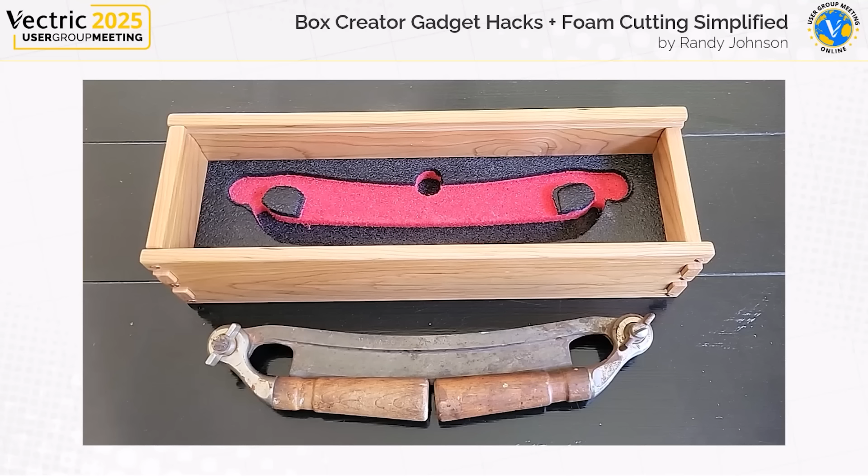One was I wanted to use extended finger joints, that is where they extend slightly beyond the side of the box to give a decorative look. I also wanted the finger joints to be equal in height. The second item I was after is I wanted to use a sliding lid as opposed to a hinge lid. And the last major item was I wanted to create a foam insert to hold the tool.

This is a folding handle draw knife. I've had this for a while. My father actually gave this to me when I was 16 years old. So I've always wanted to build a nice case for it. So with that, let's hop over to VCarve and I'll show you how I use the box creator gadget to create this custom finger joint setup.

So I already have a file set up here to start with, and I've imported a couple of pictures that show the sizes that I'm going to be using for this project. As I mentioned earlier, I want to have all my finger joints equal dimensions. So in this case, they're all going to be 3/4 of an inch. And I want my side height to be 3 3/4. And here's the rest of my box dimensions showing right there.

Now, the thickness of this material is currently set at 5/8 of an inch. And so if you look down at the lower left, I've got a depth, which is the thickness of the material, 0.625, which is 5/8 of an inch. You set that up in your job setup or in your sheet setup.

Also, I've set this up as a separate sheet. This is just a working area. See at the top here, I call it Gadget Practice. That's the name of the sheet. I have several sheets set up, and we'll take a look at those along the way. But right now, I've got a Gadget Practice sheet set up because this is where I typically just play with my design until I get it the way I want it.

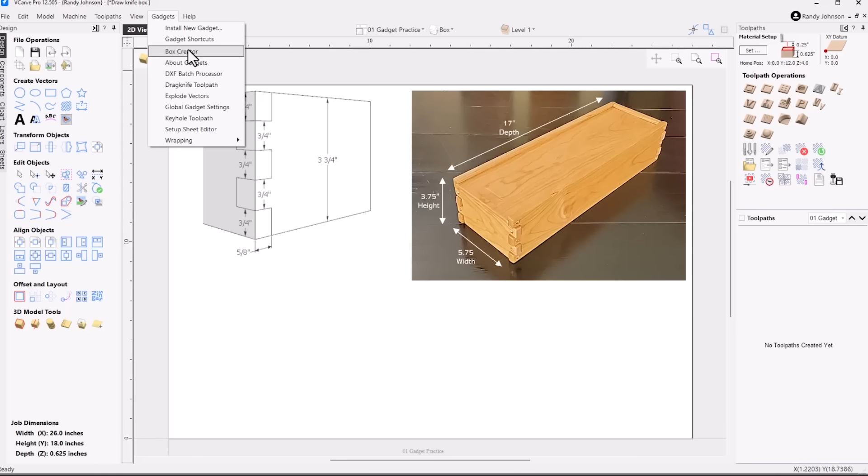Now, let's hop into the gadget, which is located at the top under VCarve Pro or Aspire. And the box creator gadget is right there. If you don't have it in your list, then you can download it from the Vectric website. Opening that up, I have used this, so my dimensions are already in there. You can see I've got a width, which is along the front of the box here, of 5.75, a depth or a length here of 17. My height is 3.75. My joint width is 0.75 or 3/4 of an inch.

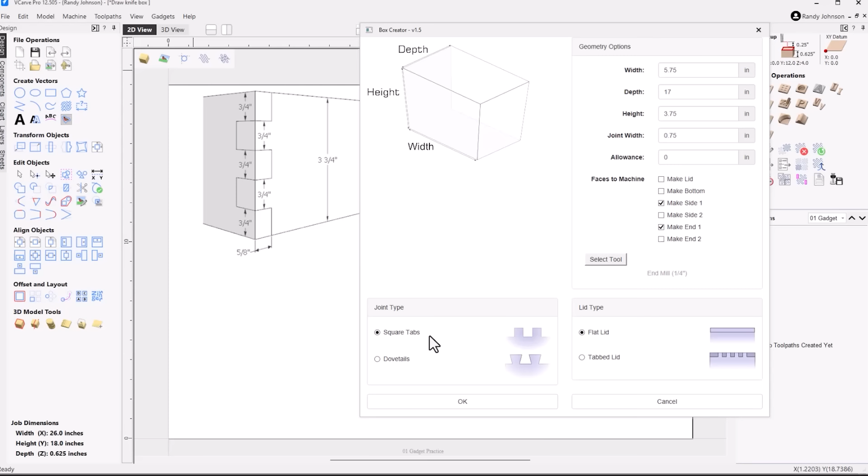I'm not going to use any allowance for this one. And I'm also only going to create one side and one end because that's all I need for the work I'm going to do. I will duplicate those once I modify those. I've also selected my tool already, which is a 1/4 inch end mill. I'm going to set this to a flat lid since I don't want tabs on the top. And I'm going to use the square tabs or finger joints. Goes by different names, finger joints, box joints. And then I'll click OK.

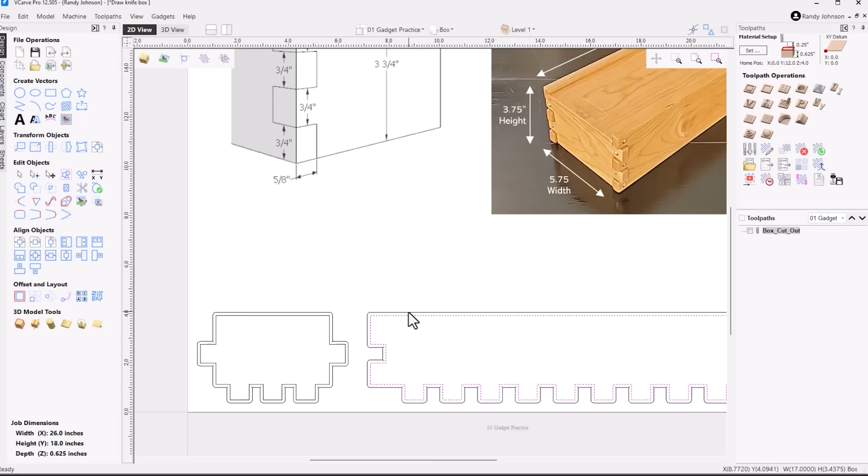And it automatically creates those two parts. It also creates a toolpath over here. And if you've not used this, it actually creates a double vector. The inner vector is actually the side itself. That's your finished part. And then what the box creator does is create a toolpath vector. And if we highlight that and look at the solid preview, you can notice that it's traveling on the line and it leaves that little dog bone fillet right there so the square tenons or the square fingers can fit together.

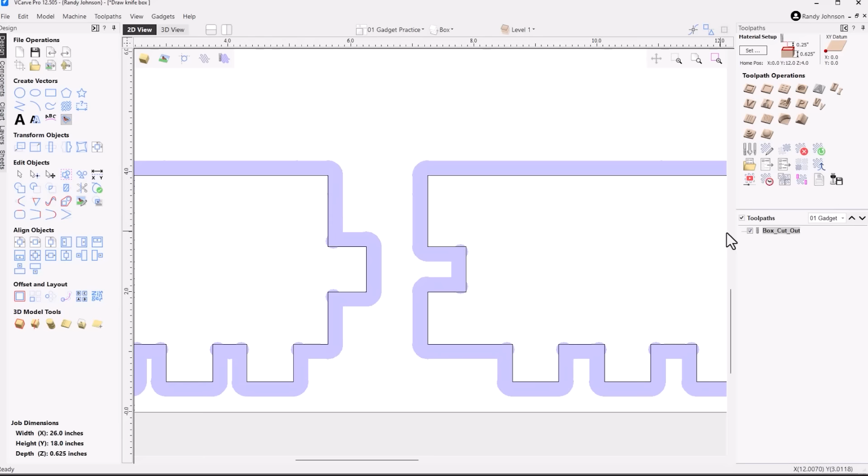Now, for my purposes, I do not need these vectors, so I'm going to delete those. Nor do I need this toolpath, so I'm going to delete that as well. These are just the parts that I'm interested in. Now, you saw that I put in 3 3/4 for the height. But the first thing you'll notice is that I have 3 tenons on this one and only 1 on that.

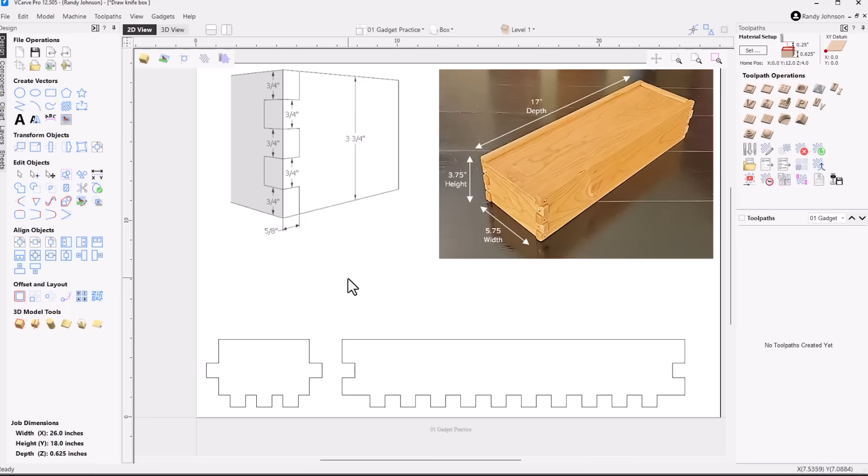So it's not matching my design, even though I put 3/4 of an inch in for the tenons. The reason for that is that if we take a look here, this is what the standard lidded box looks like coming out of the box gadget. Now this one has more fingers on it, but the idea is you can see how the lid is lipped. So half the thickness extends above the box and then the rest of the box is below, and you've got a tabbed bottom.

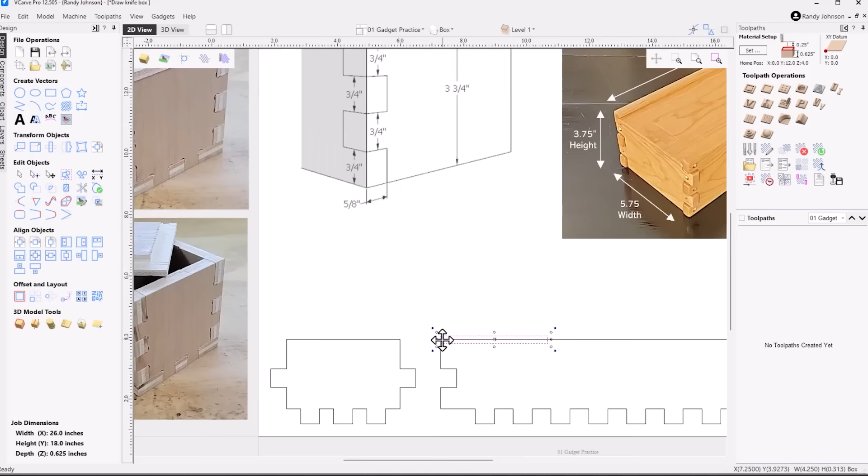If I were to take and draw a rectangle at the bottom here representing that lipped lid, and that's 5/8 of an inch is the thickness of our material, and we're dividing that by 2. So 0.3125 is the thickness of our lid, or our lip. And let's take and push this right up there. That's how the lipped lid sits on top of this box.

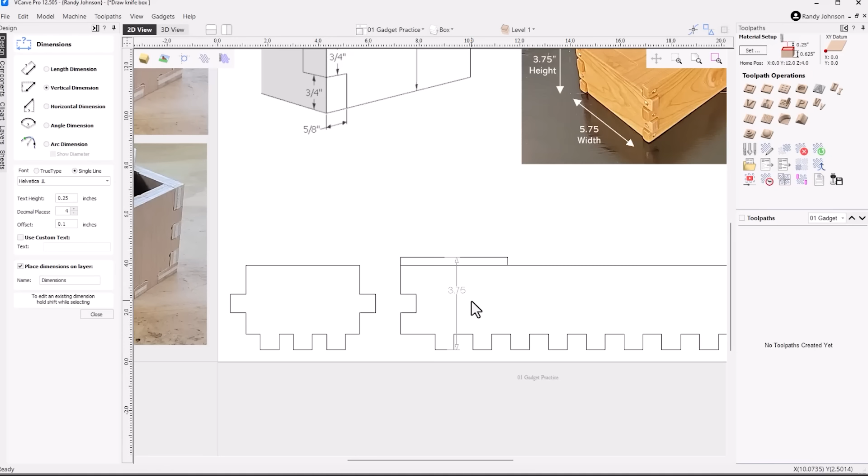Now if we pull a dimension on that, a vertical dimension from the bottom right here to the top of that lid, that gives us our 3.75, exactly what we wanted. However, it's not the configuration we want because we don't want the tabs on the bottom and we don't want the lid. So here's what I've come across as a simple formula that you could use to create the exact number of tenons you want, or fingers, as well as the height, understanding how this all works.

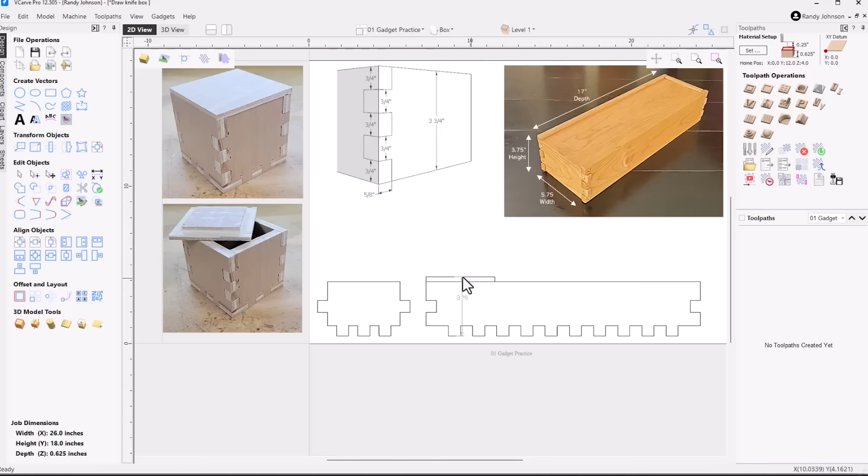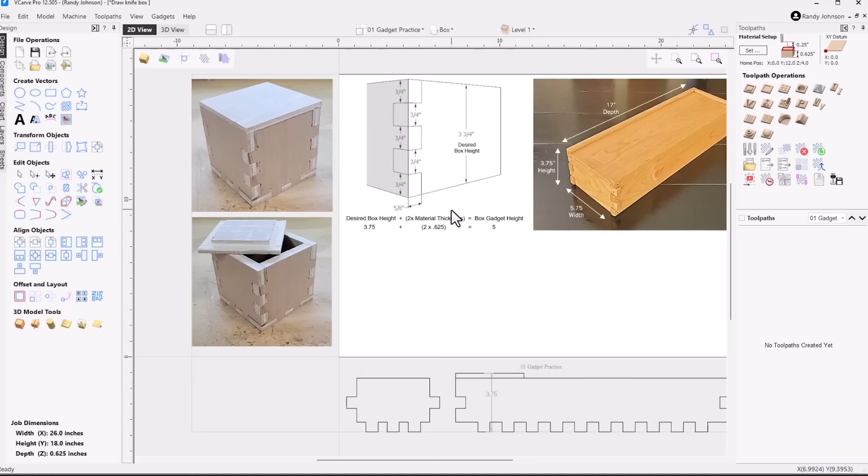Because really the only part of this box side that I want is from this line right at the top to the top of those tabs at the bottom. So to create that, let's move this down here temporarily, and I'll show you the formula, which is a real simple one. The desired box height or side height is 3.75. You add to that 2 times the material thickness, which in this case is 2 times 0.625 or 5/8 of an inch. That equals 5. That's the magic number that I use to put in for this particular box.

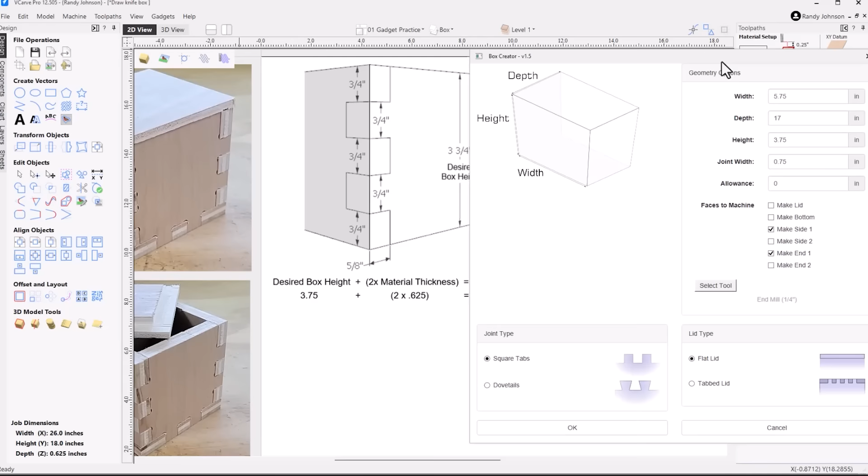This formula works with any height that you want for your desired side, as long as you have an odd number of fingers. So let's go back into the box gadget. And the only dimension we have to change here is the height to 5, because that's what we came across when we added these up. The other dimensions all stay the same. Let's say OK on that.

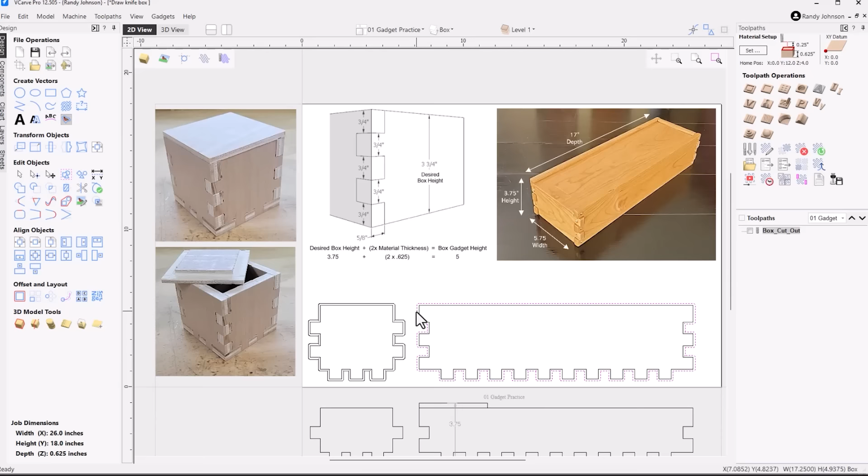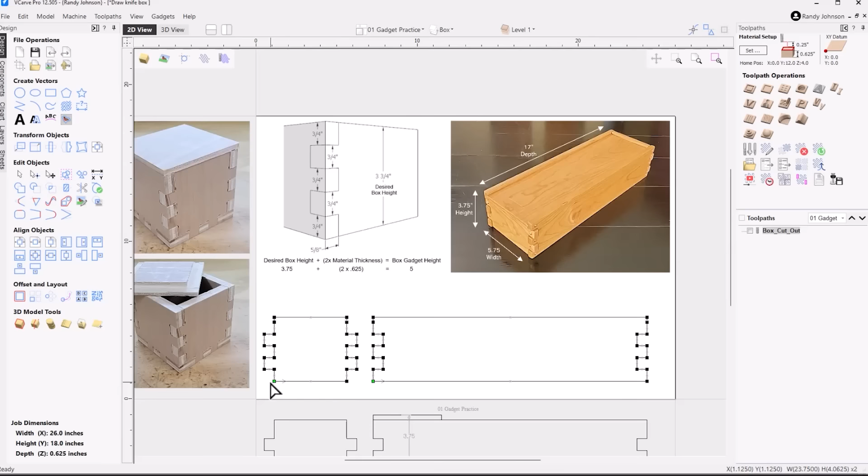Turn off our toolpath. And we don't need these 2 vectors, so we'll delete those. We can already see that we now have our 3 fingers on one side and 2 on the other, so everything's looking better already. Now, the quick way to get rid of these tabs on the bottom is simply select the vectors, go into Node Edit, select the nodes, and hit the D key to delete those nodes. We'll go over here and do the same thing. We've now deleted the tabs along the bottom.

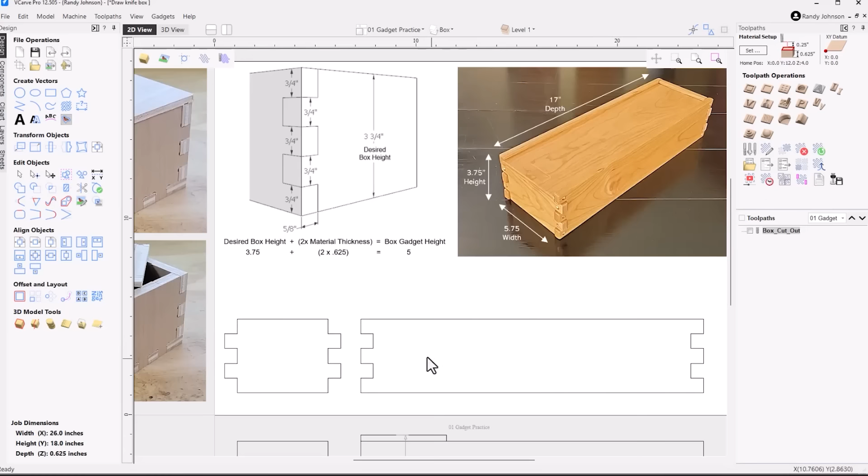Now we can also notice how this top finger seems wider than the rest. And that's because if we look at the nodes, we have that extra node right here. Well, it's really easy. You simply remove those top 4 nodes across the top, hit the D key, delete. Let's exit Node Edit, and let's pull some dimensions off of this one. First, let's do an overall height. And bingo, we're right at 3.75. And if we pull a height on these, you'll find that these are all 0.75, exactly what I wanted.

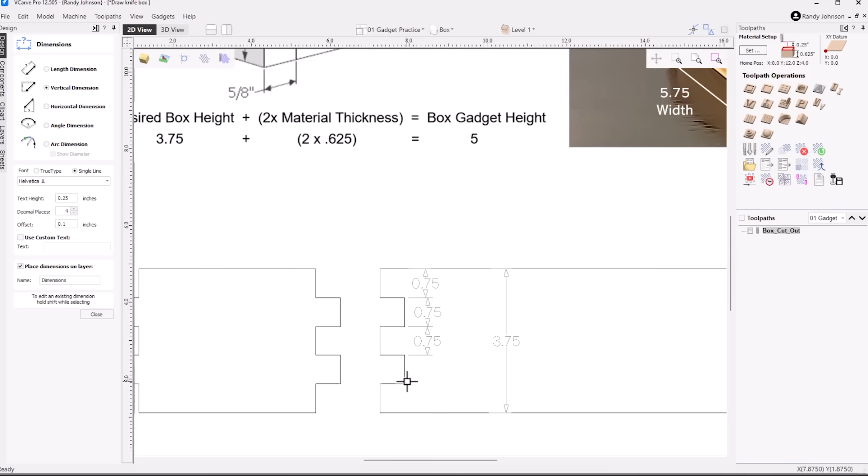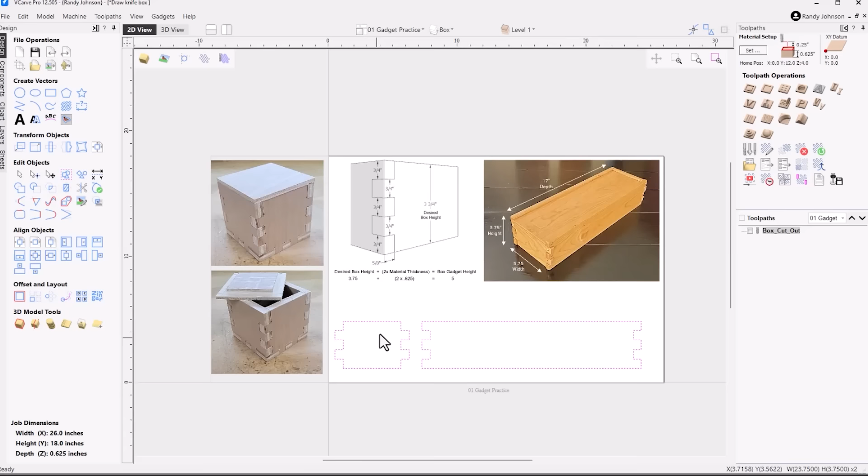So I now have the 2 parts I need to do the rest of the box. Okay, I don't need some of these vectors, so I'm going to clean up some of this, select those and delete those. Don't need those dimensions, delete those. Now I have my 2 main parts. Now the next step is I take those and move or copy them, either one works, but let's do a copy, and I'm going to go to a new sheet I've got set up here called Test Layout. So let's turn on that sheet. We'll select that sheet, turn off the first one, and hide it.

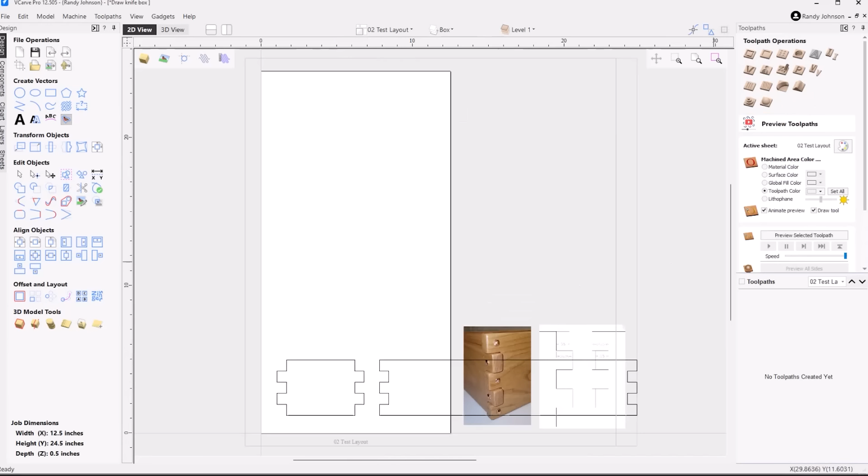I can now take these two parts and rotate them and position them back on my sheet. This sheet is set up the size of my tool. The tool I'm using is approximately 12 inches wide by 24 inches long. So that's the table size. So I'm going to use the entire table for this project.

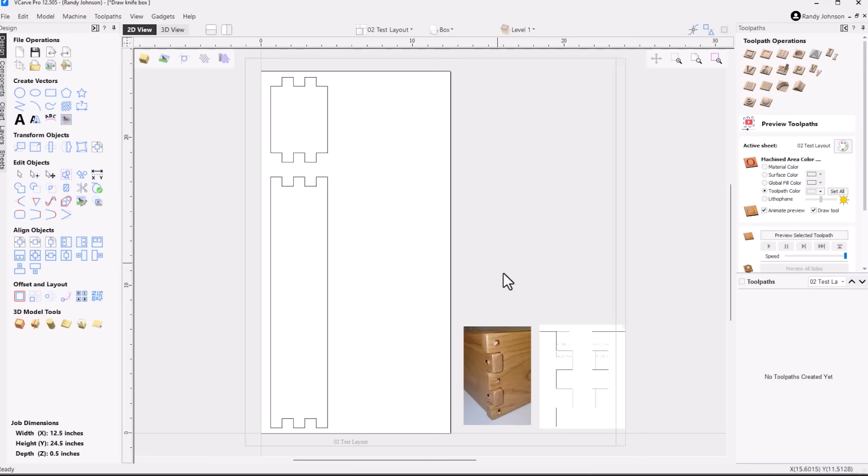Also, something I want to point out is that although I originally set this box gadget up using 5/8 inch material, the material of my actual project is 1/2 inch. And the reason I'm doing that is, as you can see here, my finger joints are 5/8 of an inch long, but my 1/2 inch sides allow me that extended finger joint design. So that's how I accomplished that.

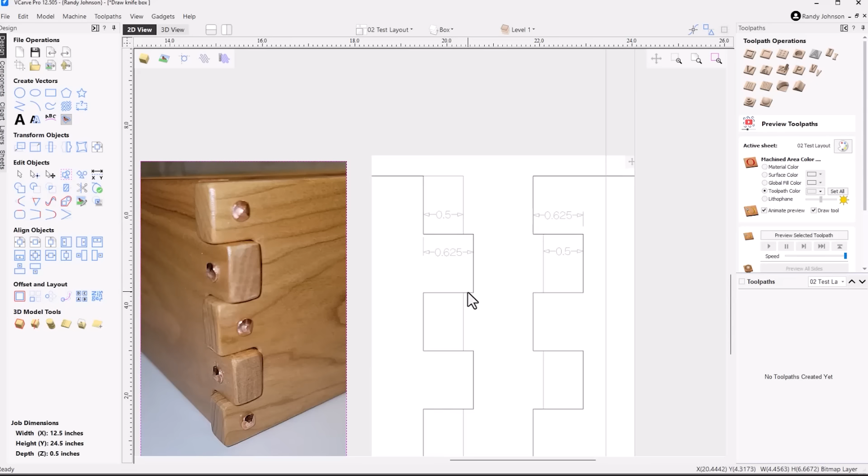Kind of lied to the gadget, telling it what I wanted. It gave me my longer finger joint, and now I can use thinner material and achieve that extended decorative look on the finger joints. Now from here, I can modify and edit, add my slots for my top and my bottom, and my holes for my decorative nails, and any other details I want to add to these two parts and then duplicate these parts over. And rather than working on 4 separate parts, I just duplicate it over.

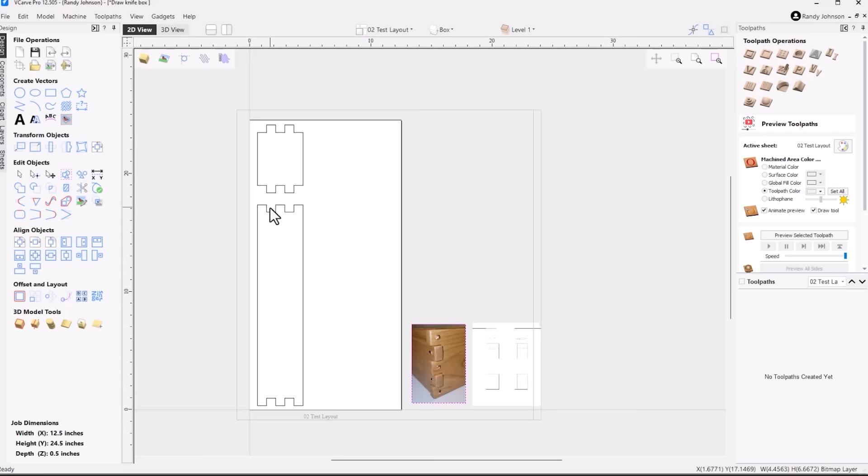The other thing is that typically, if you're going to cut this out of plywood, you probably would just set up a whole sheet of plywood here and use the existing toolpath that came out of the box gadget, and you could just cut around all of this. But since I'm cutting this out of solid wood, I'm going to pre-cut blanks for the sides of my project. And I'm also going to set up my toolpathing so all it's doing is cutting out the fingers and putting the dados in.

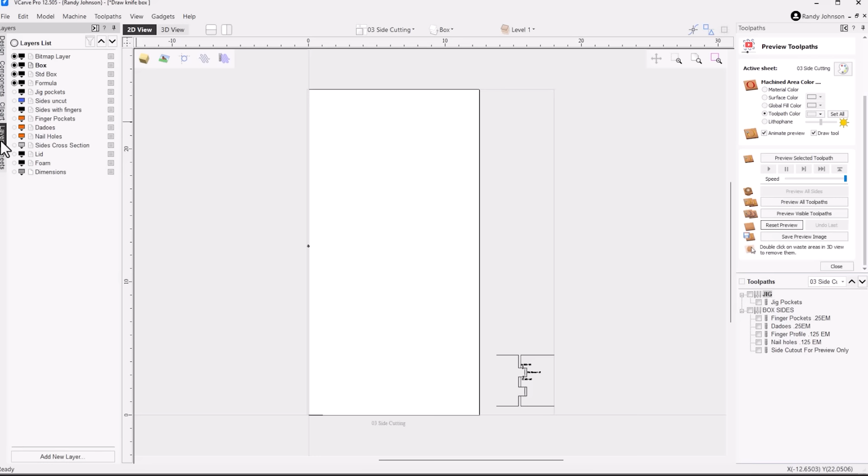For that, I've set up another sheet dedicated just for the cutting. So let's hop over to that. I'm going to go to my side cutting sheet, turn off that one, and let's take a look at this one. Now on this sheet, open up some layers here. I'll show you the vectors that I have set up. First off are the jig pockets and the sides uncut. In other words, the blue lines right there represent my blanks that I'm going to pre-cut out of solid wood, and then I'll set those inside of those pockets.

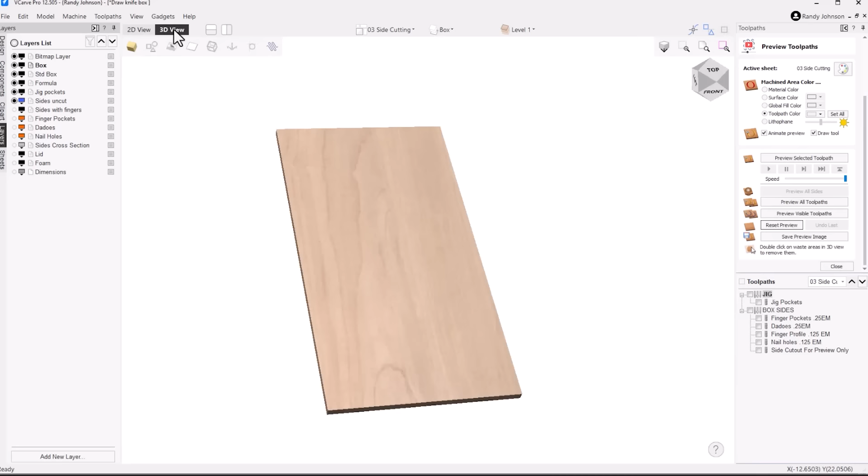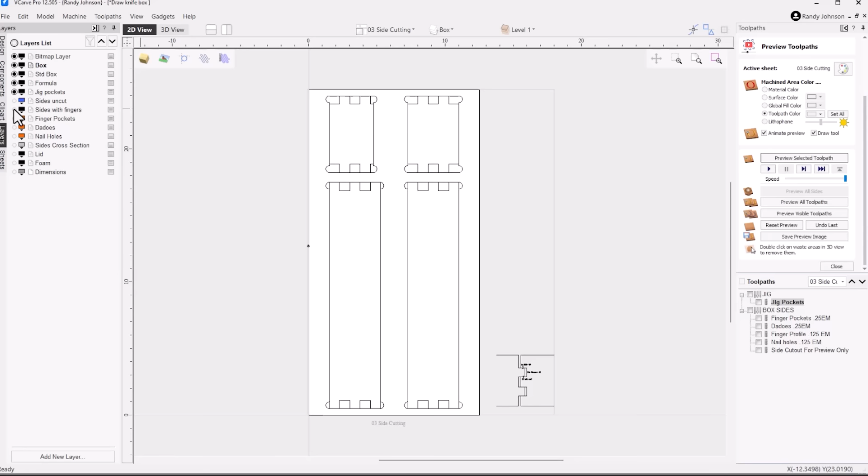Let's take a look at the 3D for a minute, and I already have my toolpath set up here as well. So the jig pockets, this is what they look like on the setup. And then inside there, I will attach my solid pieces of wood to do my finger joints. Once I have those vectors set up, I then import my actual parts that we were using in the last layout.

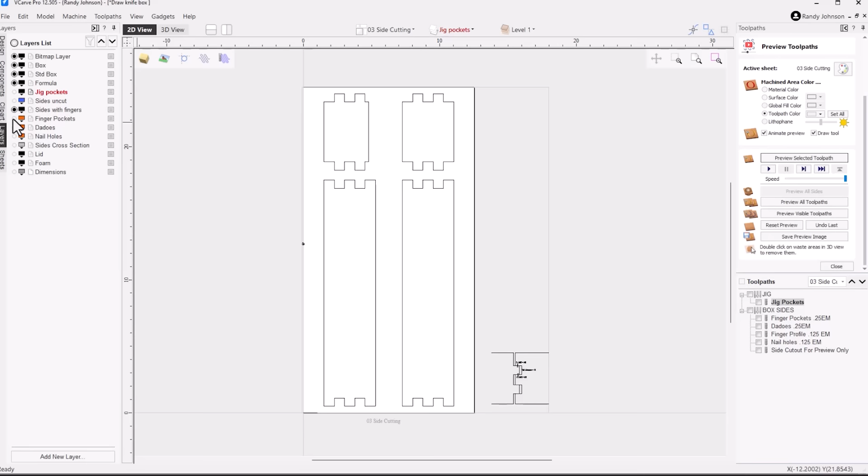A couple things I've done is I've trimmed this one down to accommodate the lid going over the top, and I've arranged them with the spacing needed for the machine that I'm going to be cutting them on. I've also added finger pocket vectors because I'm only going to cut out where the fingers need to be. So those orange lines represent the cutting for the finger joints.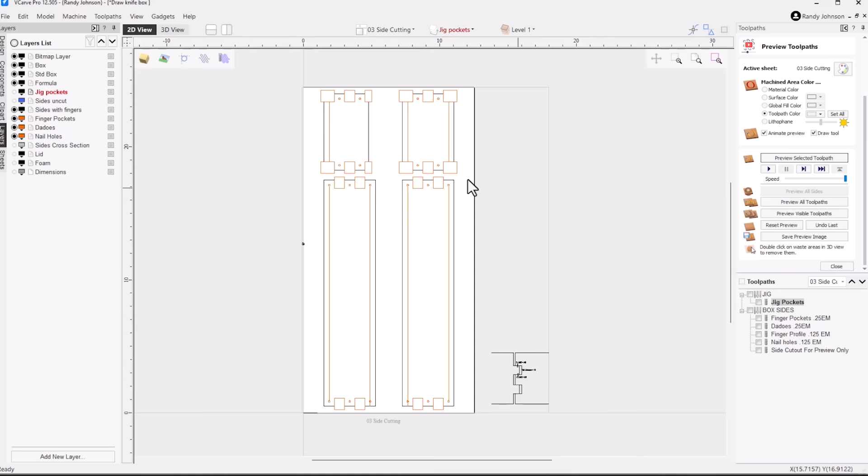I'm also adding some lines for the dados as just a single vector because I'm going to cut on the line with a 1/4 inch bit, and some nail holes going in the end. So those orange vectors represent my toolpath vectors, and that all lays inside of my jig. So let's take a look at some of the toolpaths over here. There's a couple things worth pointing out. Let's split this view out here.

One is that I'm going to rough out those areas using a 1/4 inch end mill first. Now you could profile it around in one cut, but I've found I really want to fine tune the accuracy of this and the cutting quality of it. So I like to hog out this area first with a 1/4" bit. Also, if we open it up, you'll see that I have a pocket allowance of 0.02. That's this space around the outside edge. So that creates that little remnant there that I'll then trim back with another bit.

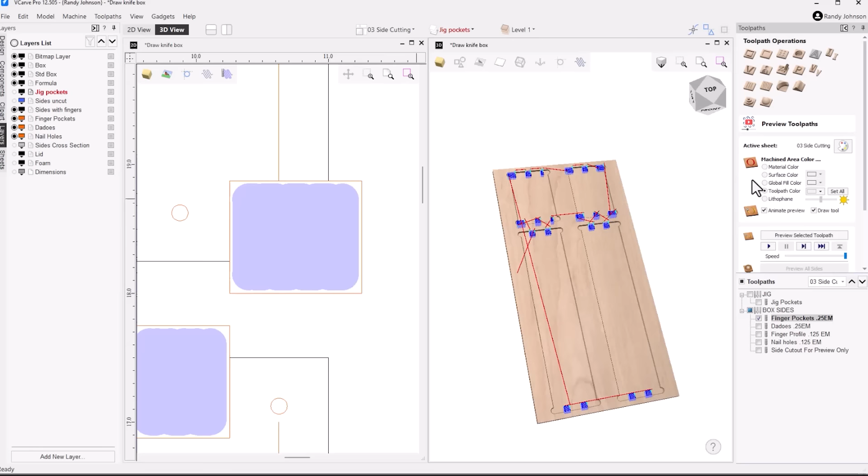Let's go ahead and preview this for a minute. Clean up, I'm going to reset this. I also have this preview only toolpath, which is basically cutting out what the parts look like. So those are my 4 parts. The 1/4" router bit is going to come in and rough out the finger joints like that.

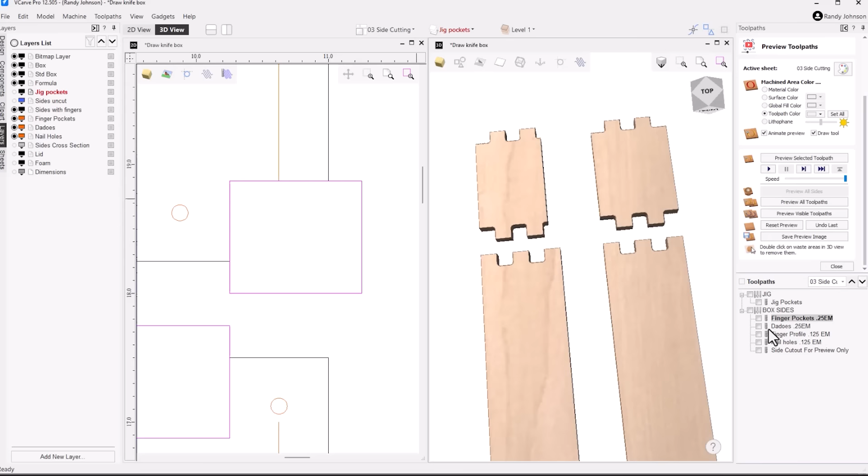I've also added my dados in there. You'll notice that in the drawing, the dados on the short ends can run all the way through because that dado is hidden with this finger that covers it up. However, the dados on these long ends need to stop short because we don't want those running through, as it would be visible on the outside of the box.

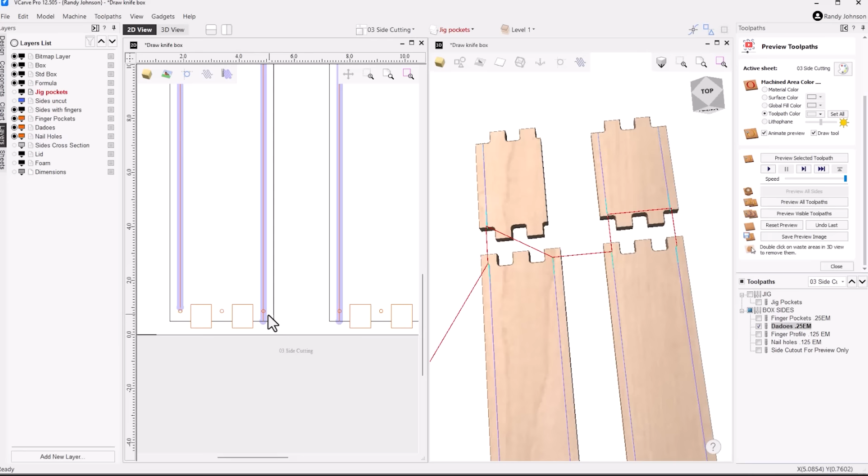However, down at the bottom, we do want a couple of them running all the way through because that's where the lid is going to slide out. So let's preview those. You can see how they extend all the way through there, but they're stopped on the other 3 areas.

Also, this piece is trimmed down to the width of that so the lid can slide over that area. That's the lid end.

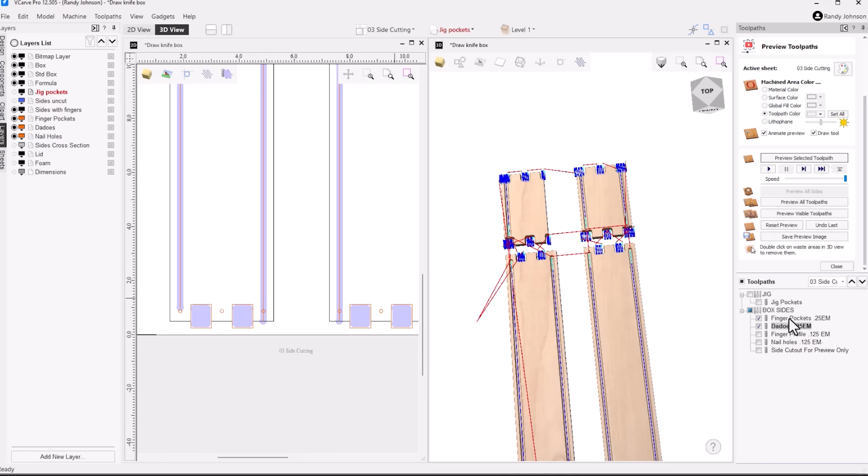So I create those 2 toolpaths together because they both use a 1/4" end mill, so I can save and run those at the same time. Having run those, I'll next run my 1/8" end mill, and this is a profile cut, so it's just profiling around it, trimming that. I'm using an 1/8" end mill here because I want a nice tight 1/16" radius on the inside for my fingers.

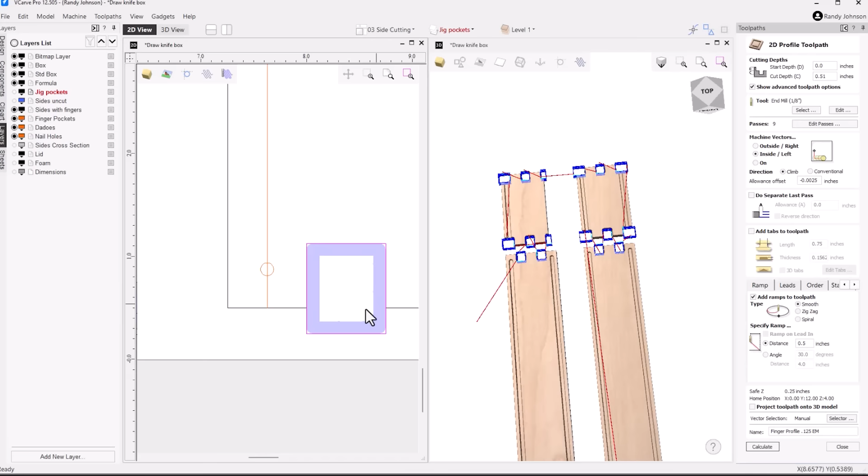I'm also going to set up this 1/8" end mill. If you look right here, I have an allowance offset of negative 0.0023 — about half the thickness of a sheet of paper. If we zoom in, you'll see it's overcutting a little bit. I need to do a little bit of allowance like that in order for these fingers to fit together. If you cut them exactly to spec, they will likely not fit together smoothly — they'll be too tight. So you always have to add a little bit of allowance.

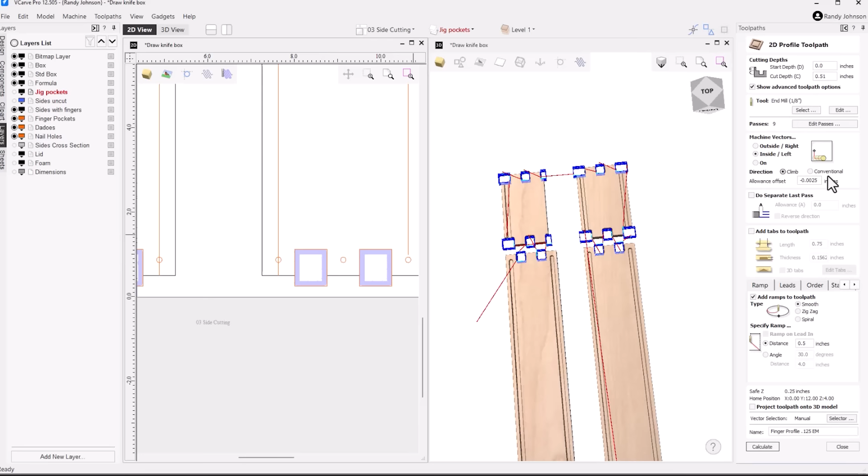Same thing applies within the box gadget itself. You can add allowance there as well. Now this looks like a really small amount, but I'll show you it actually adds up. If we look at these joints right here, it adds that 0.0023 to each side of the joint itself and each side of the finger. So it actually ends up doubling and quadrupling. So our total allowance, or total wiggle room, ends up being 0.01 — about 2 thicknesses of a sheet of paper.

Now, somewhere between 0.01 and 0.02 is usually a comfortable slip fit. I'm a little on the tighter side here, and I found I actually had to sand these tenons, or these fingers, a little bit for the fit, but I preferred a snugger fit. I didn't want to have to hammer them together, so I didn't have to. I was able to slide them together, but I didn't want any rattle in them. I wanted a nice snug fit. So that's what worked for this one.

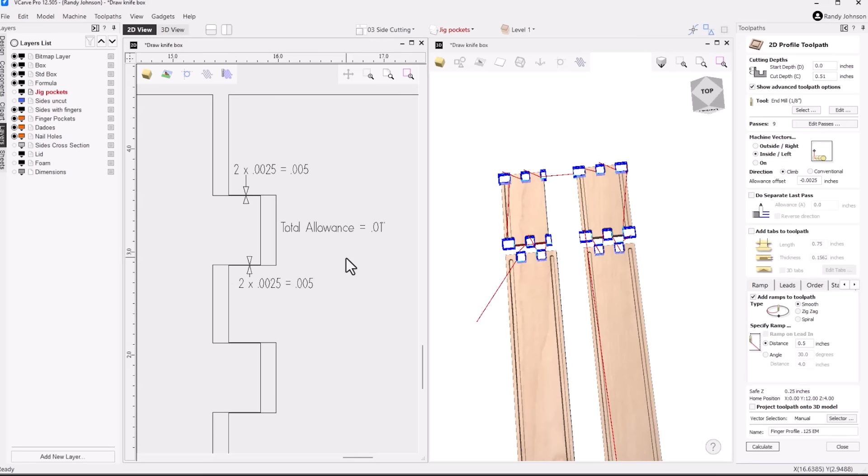You'll find that depending on your bit, your machine, material, and cutting direction, it will vary a little bit. That's why I usually just set it up to be slightly on the snug side, depending on the project. I built these boxes for storage, where I either nail them together with a pneumatic nailer, or screw and glue them. In those cases, I may have a much looser fit. But for this one, being made out of solid wood, I wanted a nice snug fit. So that's what I ended up with.

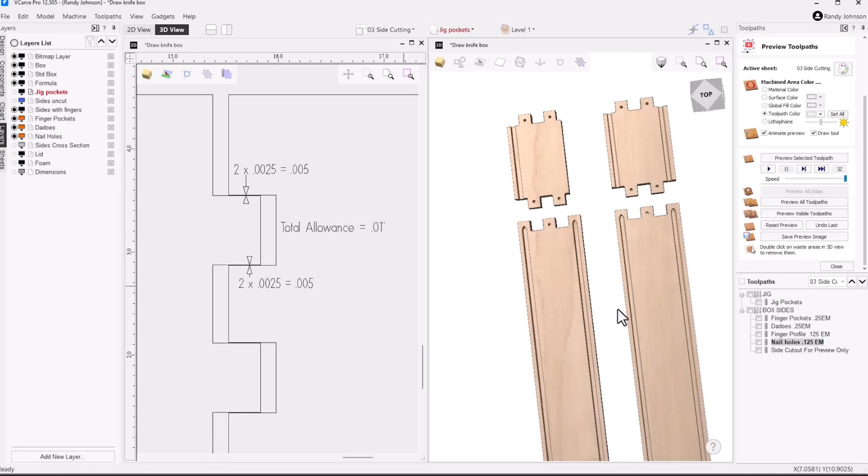So when the 1/8 inch bit is run, it will then trim that corner out and make that tight radius. The last toolpath is the nail holes, so I pre-drill those as well. And that's it for the toolpaths for these parts.

It works out pretty well. It's not a lot of setup, and the finished parts are repeatable. I've done numerous boxes with this approach. I've used this jig even for creating other size boxes too. So with that, let's hop over and look at some things I did on the machine setup.

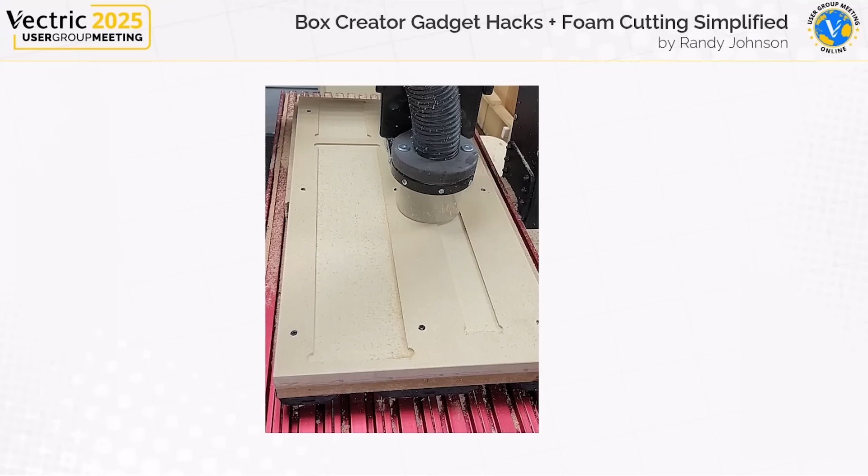So here you can see I'm machining out the pockets for the jig areas for holding the material in place. It's just 4 of them all lined up together. I actually added a piece of MDF to the top of my existing spoil board, screwed it down, and then machined those out with a 1/2 inch bit. Then I added my solid lumber.

Now, there's lots of ways to hold this down, but obviously clamps in this situation, you can put clamps along the side if you want, but this technique of hot melt glue has become kind of my go-to technique. I know some people will put tape on the bottom of the board and put CA glue or super glue underneath it, and that's certainly a fine way of doing it. I have found this technique to be my favorite, and it's surprising how well the hot melt glue holds.

Now I put tape along the edge of the project itself so the hot melt glue doesn't get into the grain of my finished project. And it tends to peel off or scrape off the MDF jig easily as well. So that's how I set that up.

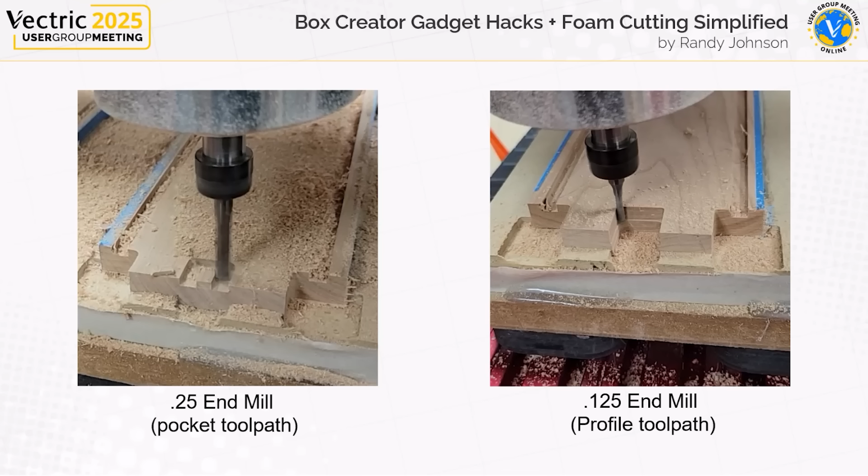Then, as I mentioned earlier, I start out with a 1/4 inch end mill to pocket out that joint. And then I go back with my 1/8 inch end mill and trim off that 20 thousandths odd amount just to get that nice snug fit. And you can see here on the right how that inside corner is much tighter. Of course, since I'm using an 1/8 inch diameter bit, this creates a 1/16 inch radius on the inside corner.

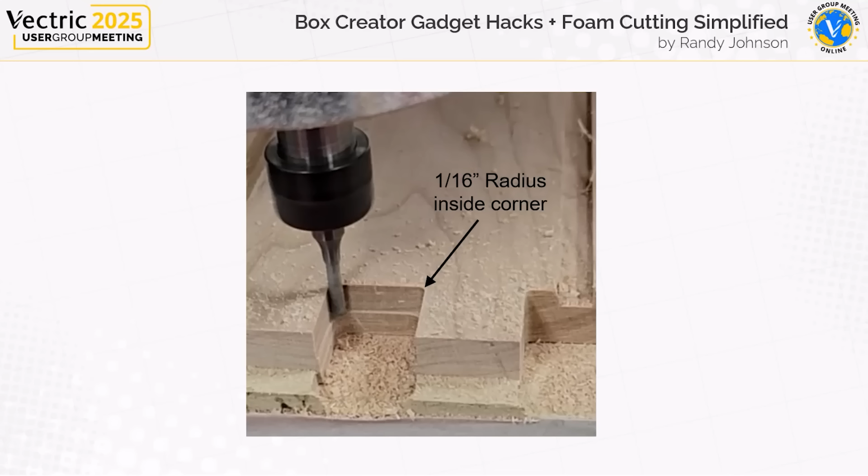Now I did away with the dog bones because I don't want to use dog bones on this project, but I still need to accommodate the fact that the corner of the tenon, or the corner of that finger, needs to fit into that inside radius corner.

So for that, I picked up a 16th inch radius roundover bit. This happens to be an Amana. It's called a mini or micro bit. It works really well to create those little teeny roundovers, and you can see on the right side of your screen there that the strategy for this is how those parts then fit together. That gives me kind of that organic rounded shape with all the pieces fitting together.

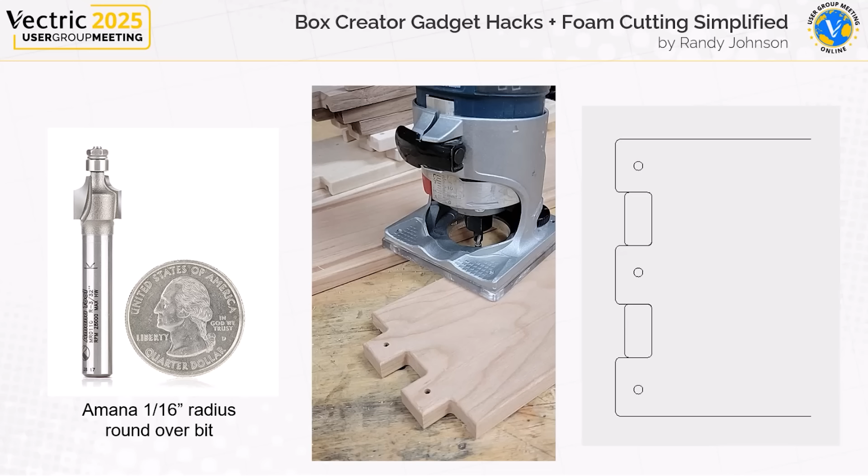Now this bit, I have had really good success with it. However, that bearing is very tiny, so you can't put a lot of pressure on it because it's kind of fragile, and it's kind of consumable because you put a lot of mileage on that router bit. So I tend to use it until it burns out, and then I typically just replace it. But I've had good luck with this, and I really like it for that little tiny roundover.

Next, let's hop back into VCarve, and I'll show you how I created this nifty little thumb pull on the lid.

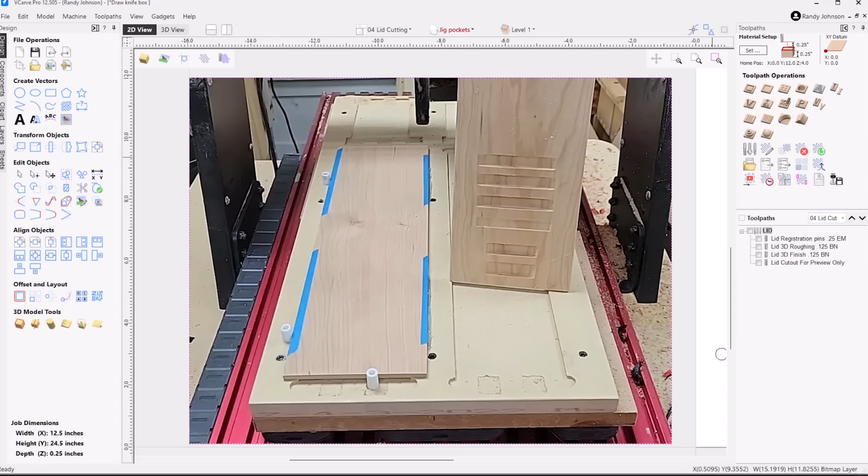I'm a big fan of repurposing or using the same jig for the entire project. So rather than set up a whole other jig, I actually just created some registration pins inside the existing jig to position my lid material. I also, as you can see here, ran several samples.

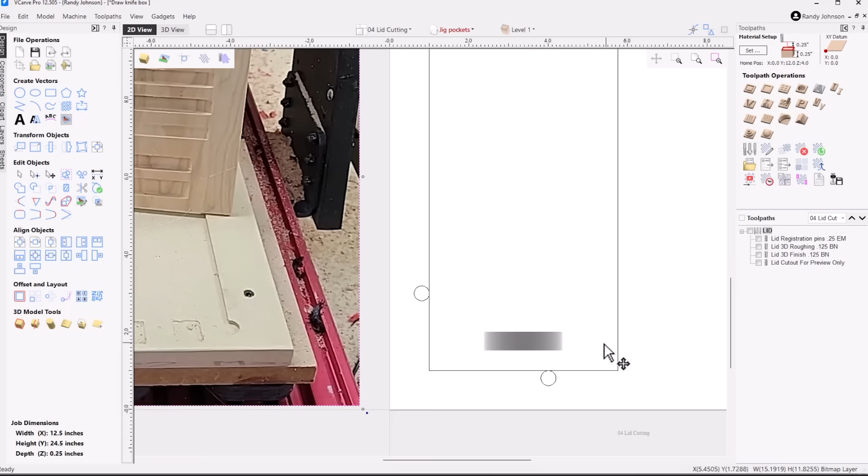Now that finger pull is actually a little 3D model right here. And if we look at the 3D view, it's just that little scoop like that. Now that's something that you can create and customize the width or length within VCarve.

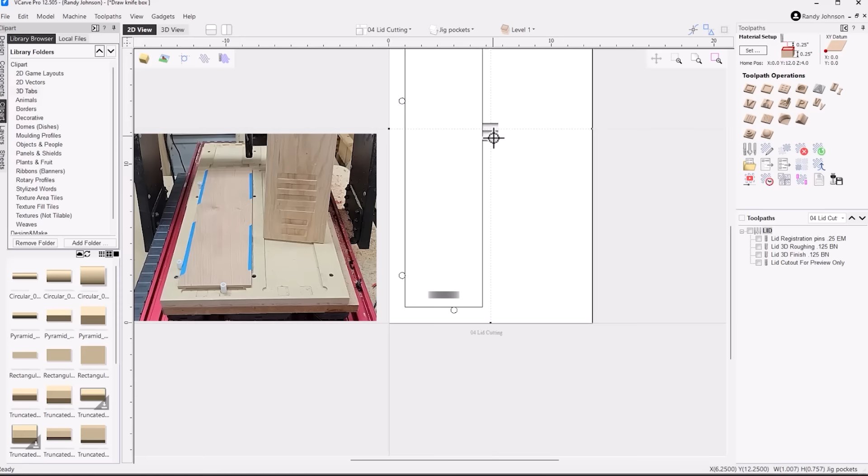And here's the trick. Start out in clip art, grab a 3D tab, double click on this one, works fine. There's the 3D tab. I'm going to drag it down here. And let's split this view so you can watch as it happens.

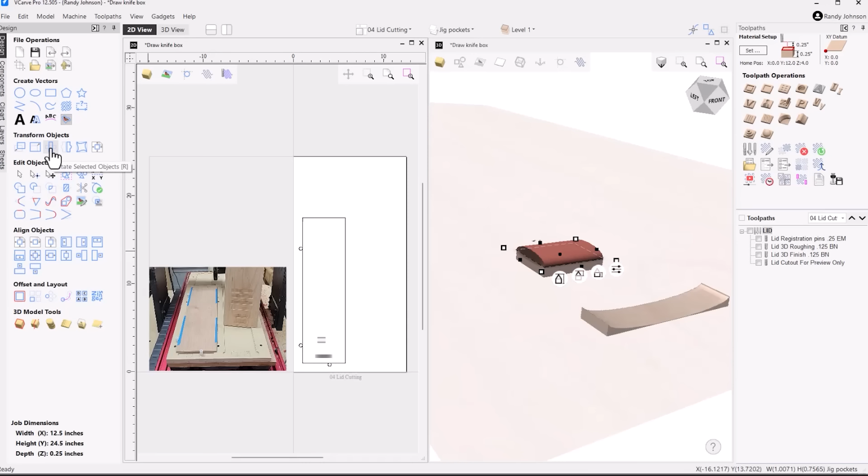So right now the 3D tab is standing proud, of course. I'm going to select that. I'll use the design window for my editing. Now you can rotate it manually using the 9 or the 0 key on your keyboard. Notice that if I select that and I hit the 9 key, that does the trick, or you could use the rotate tool, whichever.

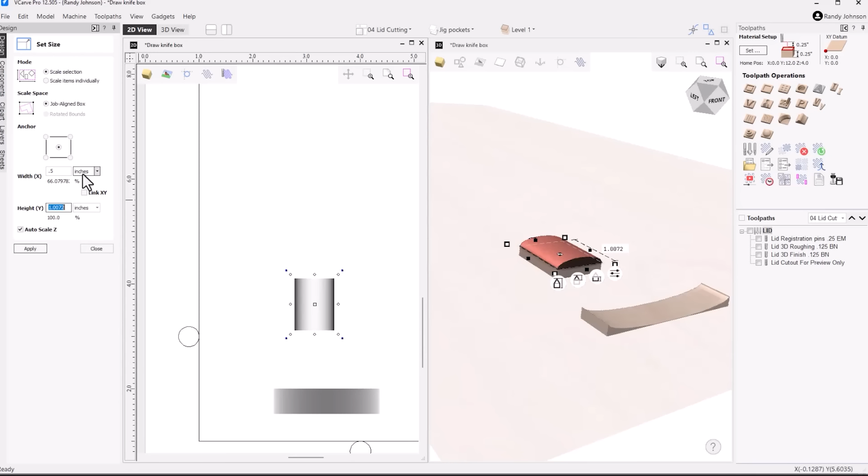Next up is I'm going to decide how wide, how deep, how long do I want it. So I'm going to go into my set size tool here, and I'm going to unlink that, and I want it to be... width is actually the height dimension there. So I'm going to go 0.5 on that, and then 2 inches on that dimension, and click apply. Okay, let's switch that up. Let's go to that direction and 0.5 that direction. There we go.

Now it's standing proud, so at this point, let's uncheck the Auto Z, close out of that. Let's go into the component window, and there's my circular tab. Let's open that up. First thing to do is let's put it to subtract.

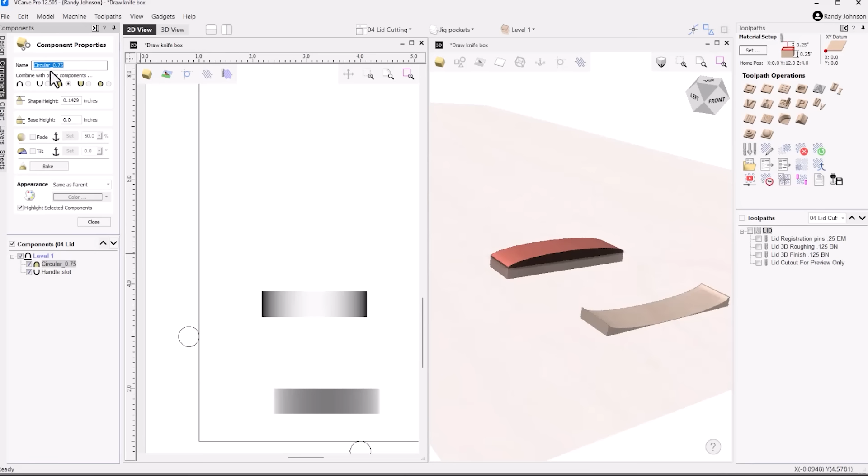And that matches that shape. And then the height, I'm going to round that off at 0.15, and that mimics what I already have. So that's a simple way of creating this shape.

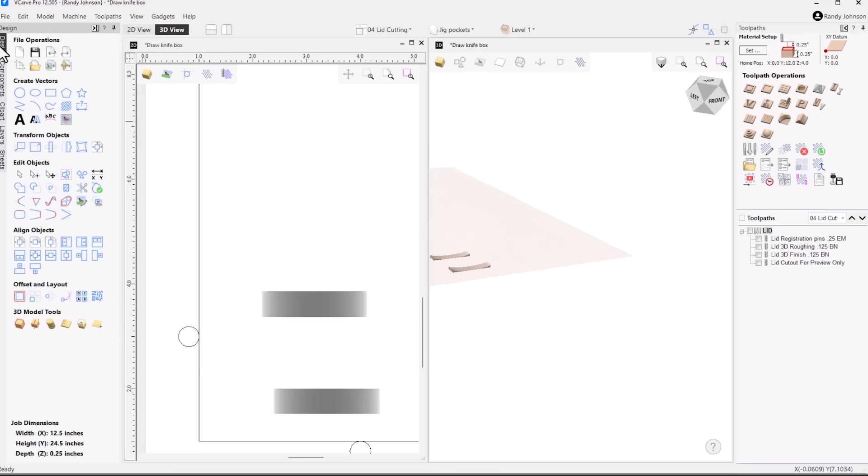And then within the Toolpath setup, let's take and rotate that. I don't actually need that one, so let's delete it. I also inside here create this preview cutout so that I could just trim out that piece like that.

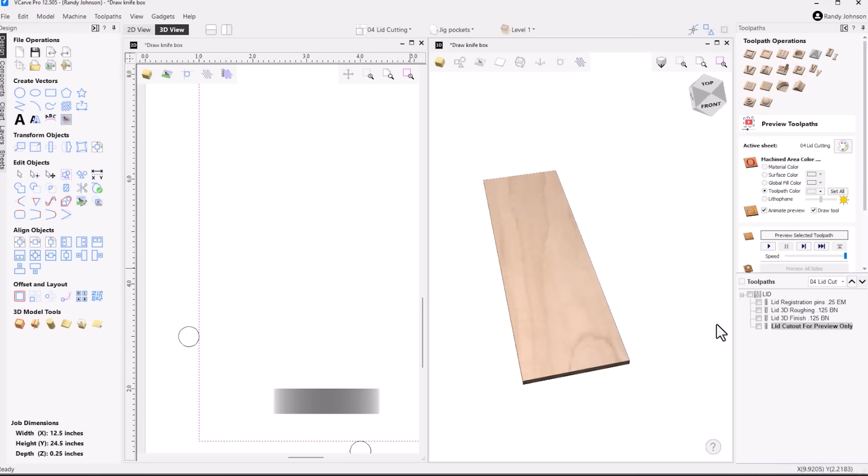So I'm kind of just dealing with my top material for illustration purposes. I also have my registration pins already programmed in there. You can see how they are here on the left side as well as the picture. So I've got those all programmed in.

And then I'm using an 1/8 inch bit to rough it out. So let's preview that. That roughs it out, and then the finishing toolpath to finish it off. And it's really that simple. It creates a nice little 3D finger pull on any project, and you can set it up whatever size, width, height, and depth you want.

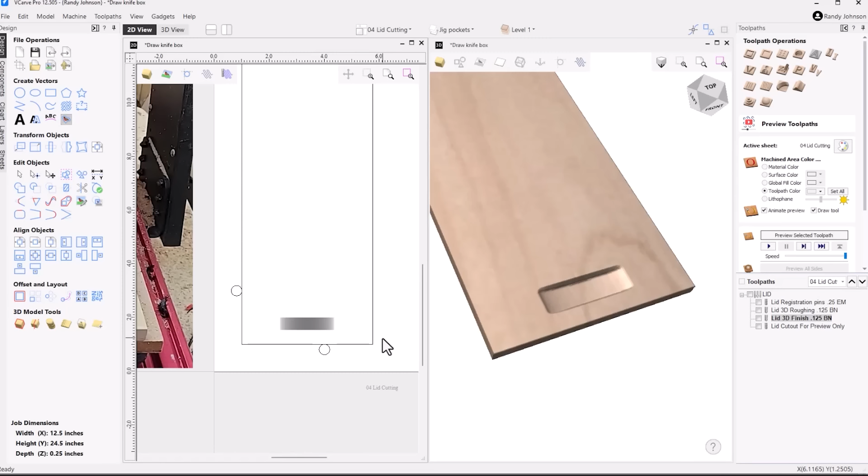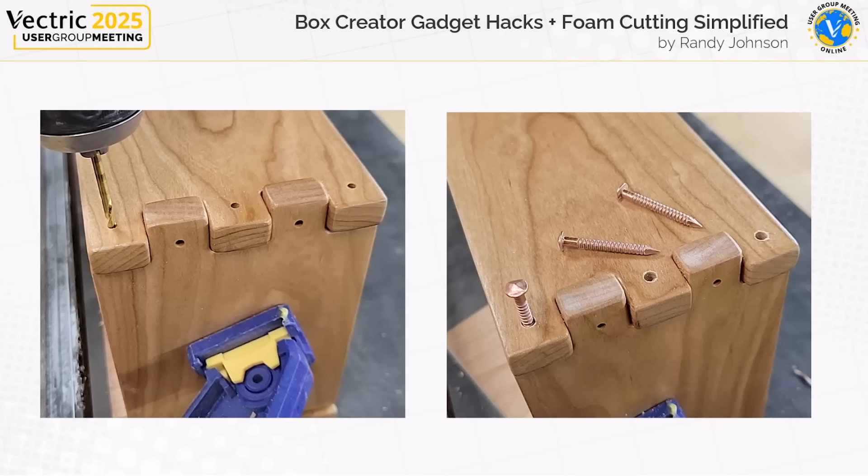Once I had all the parts made, I pre-finished them with a spray-on lacquer, and then pre-drilled for the nails, the copper nails, so it wouldn't split out, with an 1/8 inch bit, and then drove the copper nails in on the ends. Well, the final part of this project is the foam cutting.

So let's take a look at what I did for this particular project. Hop over to VCarve again. So I'm still in my same VCarve file. This is just another sheet that I set up. If you looked at the list of sheets, I've got a foam cutting sheet set up.

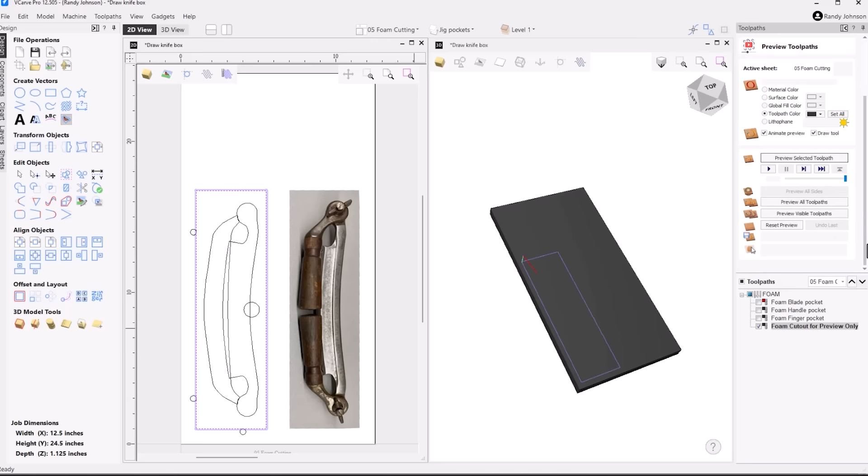And one for a finger pull, because each of those are going to be at a different depth. I then set up toolpaths for each of those, the blade one being first. Again, let's take this preview and trim out that section. There we go. There's our basic block of foam.

And for the blade pocket, that's going a little under a 1/2 inch deep. So that's the blade pocket. And then the handle is going a little deeper, so that goes down like that. And then I've got a finger pocket.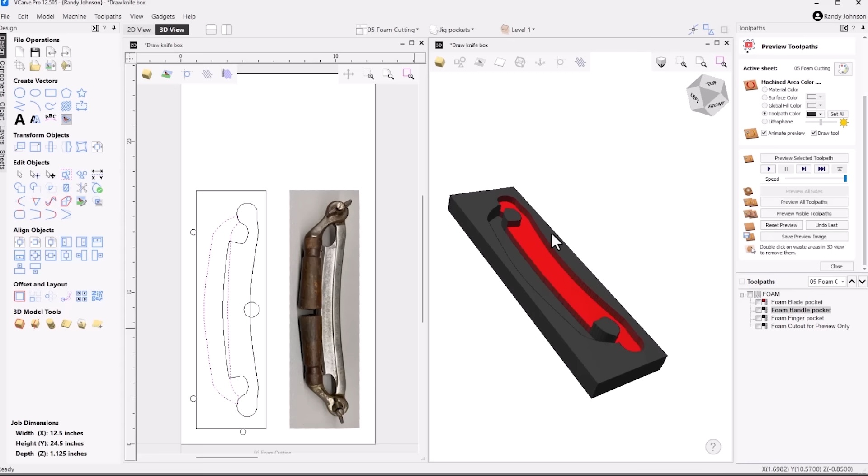And it's pretty straightforward. Now I'm going to cover the bits and the feeds and speeds here in a little bit, but I just wanted to show you this first just to give you the basic lay of the land here in VCarve, how everything is set up. Again, it's pretty straightforward. My feeds and speeds on here are comparable to what I would use slightly on the slower side for wood.

I'm cutting a little more aggressive on the depth. My RPMs are slightly slower than I typically would use with this particular tool. As you can see there, I've got an 18,000. Your machine, you may be able to even run slower. I've got a feed rate of 150 and a plunge of 100, and I'm using a 5/16 inch end mill for this.

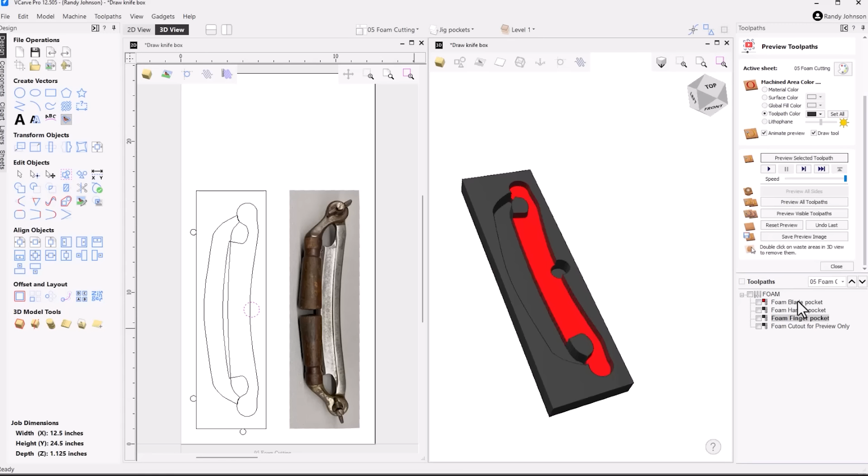It worked out fine for this particular setup, but let's hop back and look at some of the other parameters of setting up and cutting foam. So to start out, to show you a bit of the setup, I used a little piece of plywood, aligned that with the existing registration pins on the jig, added some tape to that piece of plywood as well as some tape to the bottom of the foam, and then used CA to hold it in place, and it does a nice job.

Now, a couple of things to consider when you're foam cutting. First off, thing to remember is use a fresh, sharp bit. In this case, I'm just using a straight 5/16 inch diameter bit. You could go with other diameters depending on your project. This is a brand new bit, it's razor sharp, and it did a nice job of removing the foam.

The second thing of equal importance is use conventional cutting. There's a temptation to use climb cutting thinking you get less chipping like you do in wood, but actually you get a ratty or rough edge if you use climb cut.

So use conventional cutting. These two items alone will greatly improve your results. The third item, which is also important, is that denser foams cut more easily. So the denser the foam, the stiffer it is, the more easily it's going to cut. There are a wide variety of foams in the market, just like wood. There's a whole lot of wood out there, types of wood. There's a whole lot of foam.

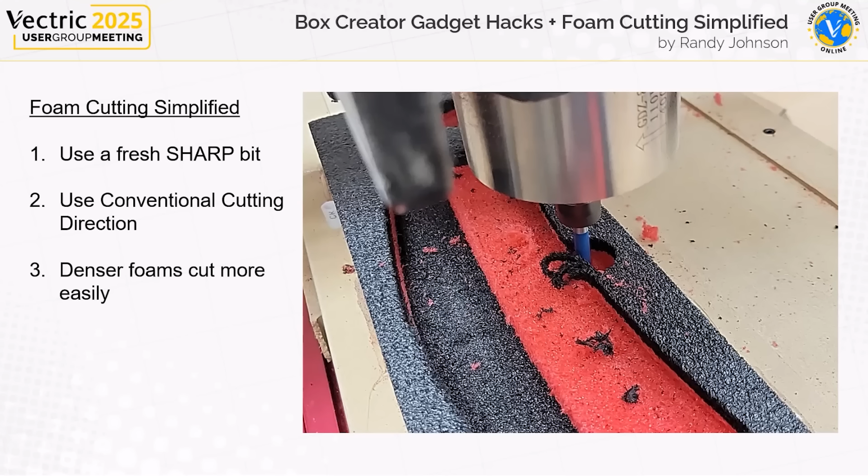And some of the really soft foam that's used in things like upholstery, it's a polyurethane foam, and it's actually just too soft to cut. But if you move to a denser foam, like a tool foam made for tool cutouts like this product here or something similar, it'll cut much easier. Reducing your RPMs to reduce melting. With some foams, if you're running your RPMs too high, you may create some melting on the plastic. So reducing your RPMs will also help.

And of course, test cutting is always important. Get an understanding of what's capable with your machine, your foam that you're using, and your particular router bit. Now, there are some really great videos online. You'll come across people who do this professionally. Again, like I said, I just wanted to provide a very simple boiled down method. And I've watched some of those in the past, and I've run some tests, but I thought, you know what, I'm going to run some new tests just for this presentation.